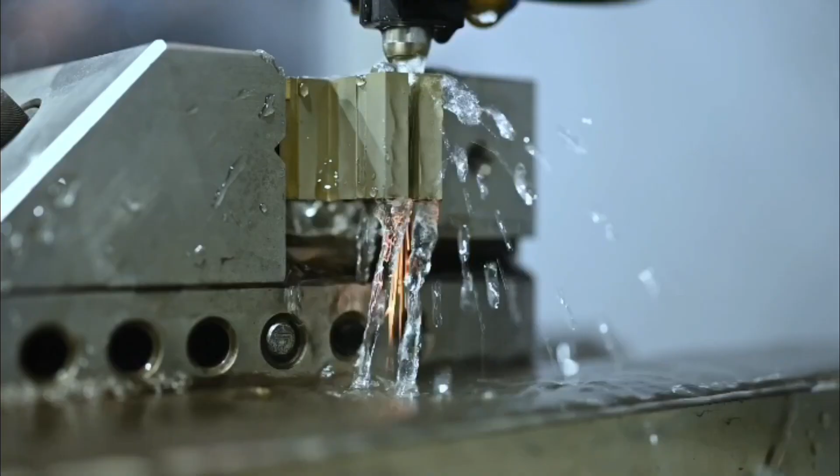Zero tolerance for another episode of Learn to Burn. Today's topic is going to be the challenges of mold making.

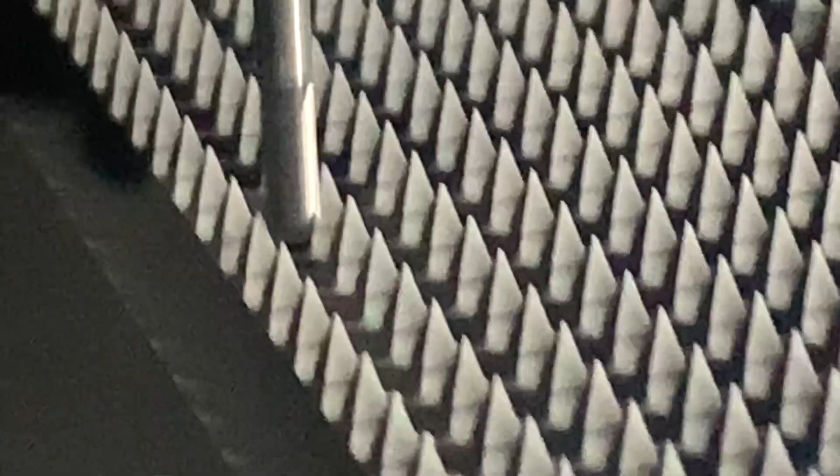I want to talk about how this trode came to be the way it is. Mike will get into the details on it, but this is a combination of three different tool makers' suggestions as to how to achieve these features. And all these features that you see right now, this is literally a quarter of what's needed for the job, and I'll let Mike get into the details on this electrode, as you'll hear in just a minute.

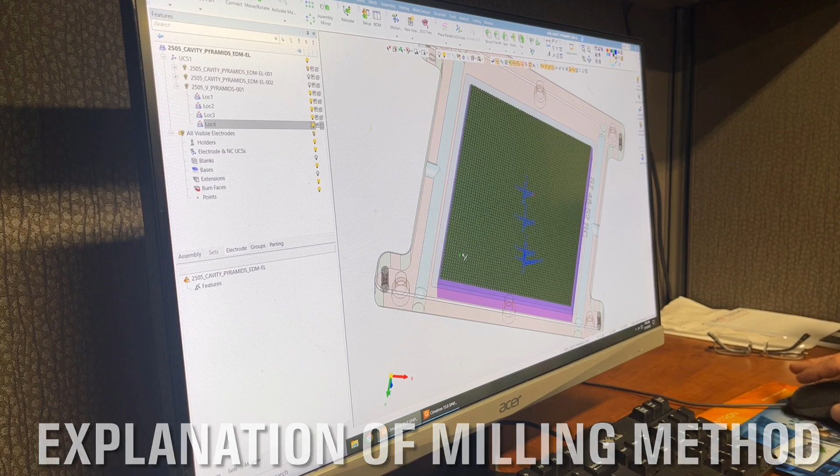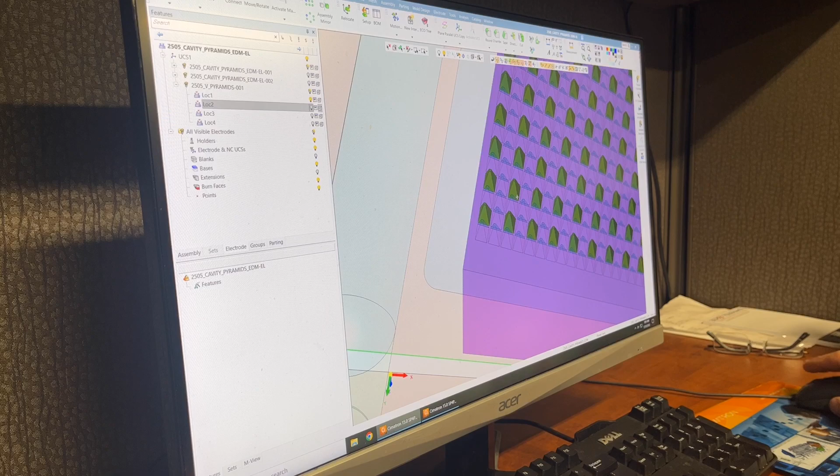We'll start it here. So this is roughly a 5x5 electrode with approximately 5,000 forms standing on it. And the forms are so small that we cannot apply overcut or get a cutter in between here without crashing into the next feature. In order to solve this problem, we eliminated every other form in both directions on this electrode.

What that allowed us to do was to go with a much larger, more robust cutter that would fit in between here, apply overcut to the form without damaging anything else. So you see, this is the first rotation in green. The pink is the unfilled spaces. Second rotation, third rotation, fourth rotation. This completes the entire form and still allows you to cut the electrode with a cutter big enough to make some time on it.

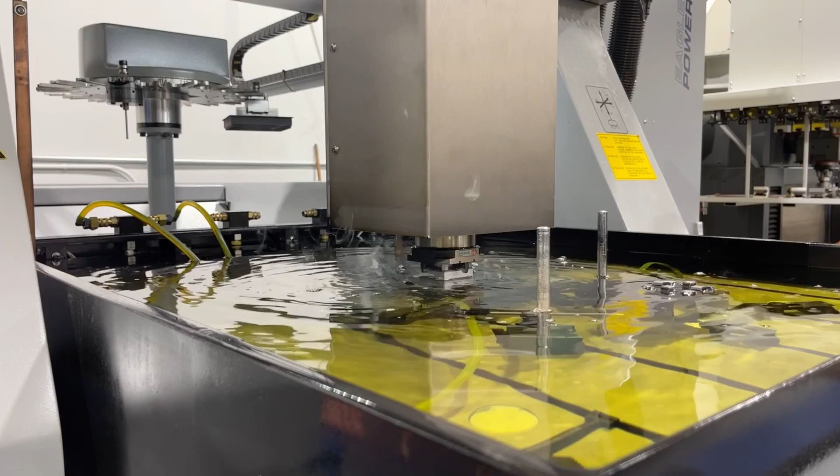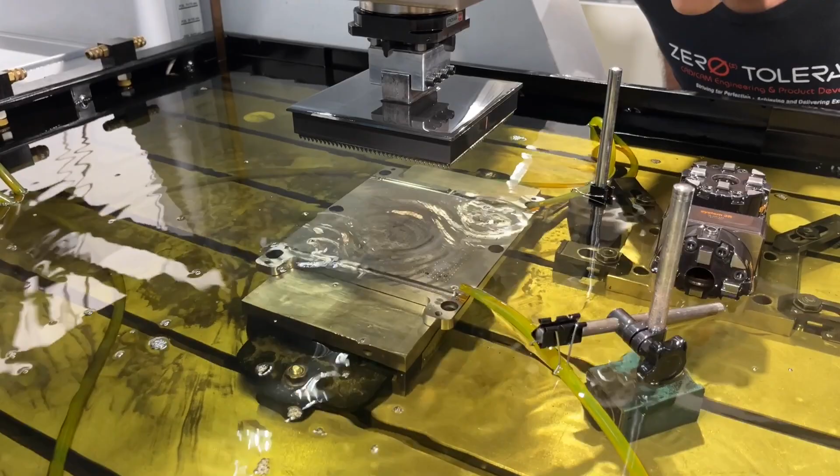Alright, we're at the first stage of this 4-stage electrode. This is going to actually give us a real good way to make these tiny little features all in one electrode, but we have to burn it in 4 places, so it's acting like 4 separate electrodes. It made it fast to cut, like way faster, like a third of the time, and it might take a little longer to burn, but we're going to have a lot better results and more efficient. So this is a real challenging type of burn for a very simple shape.

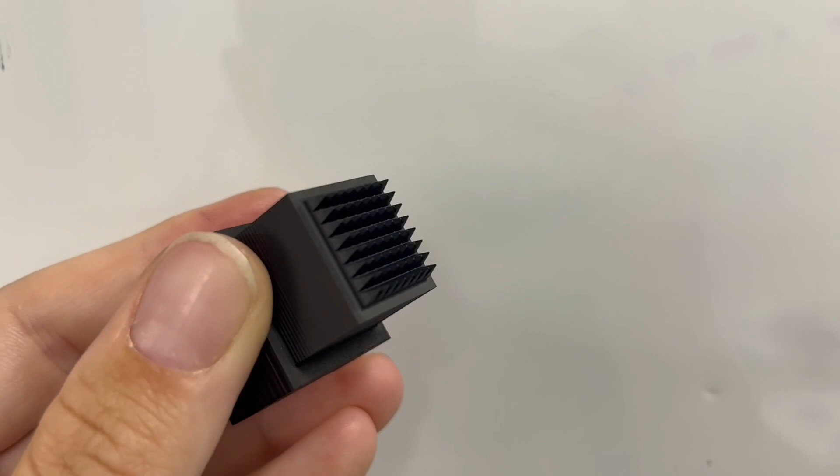Here's a test cut trode that we made, and we determined that this was going to take way too long with too many cutters that would potentially wear out. So that's why we changed our method.

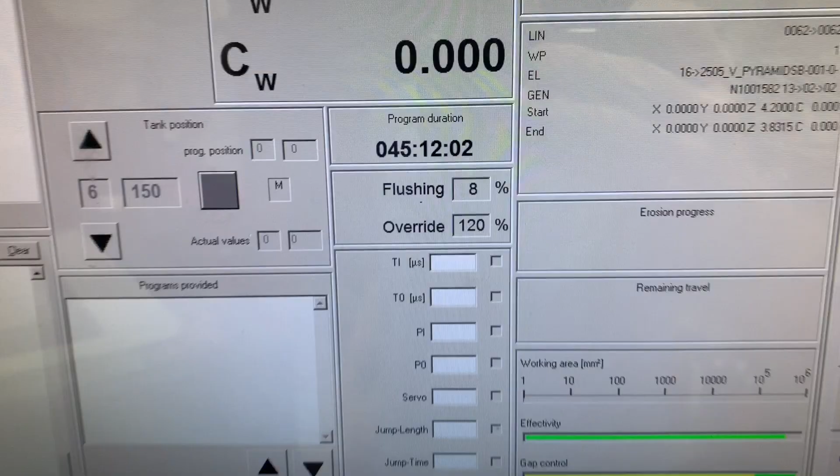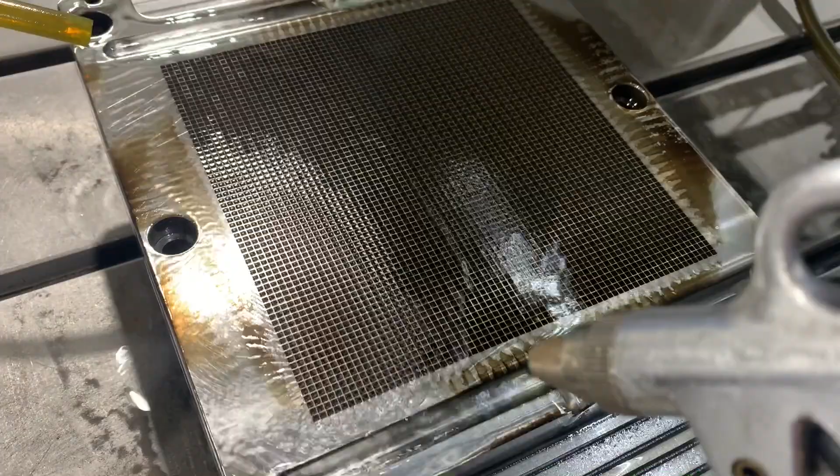Okay, we're here with this really tiny electrode pattern that we put in. It looks like a really good success. We're gonna take a look. It's a 45-hour burn that we've got there. So let's take a look real close. I'm gonna blow this off and see how it looks. I'm gonna move this head back so we can see the light a little bit better. And I'll continue to blow this off and really get a good look at it.

Now, inside here, I don't know if we'll be able to fill this with plastic very well, but we're gonna do the best we can. Depends on how well it packs it and fills in all those sharp corners. Cleaned up, we'll be able to see better.

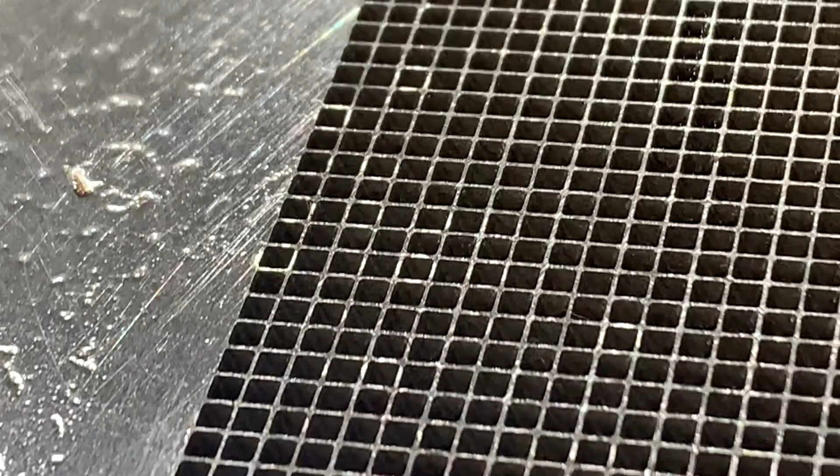I do want to point out some little tiny damage that we see as a result of the higher amps we were trying to push through it. You see these shiny areas? The arc that was created from this electrode with all the power, it actually made a circle area, and I can't hold this very still, but I just want to show you. You can see the shiny areas where it looks like it's slightly damaged a little.

We actually may have to take this block and grind maybe a half a thou or a thousandth off of it to make that clean up. But it's very little, but if you have those settings wrong, that's what can happen. That's a challenge of building molds and making stuff that's never been made. So very cool.

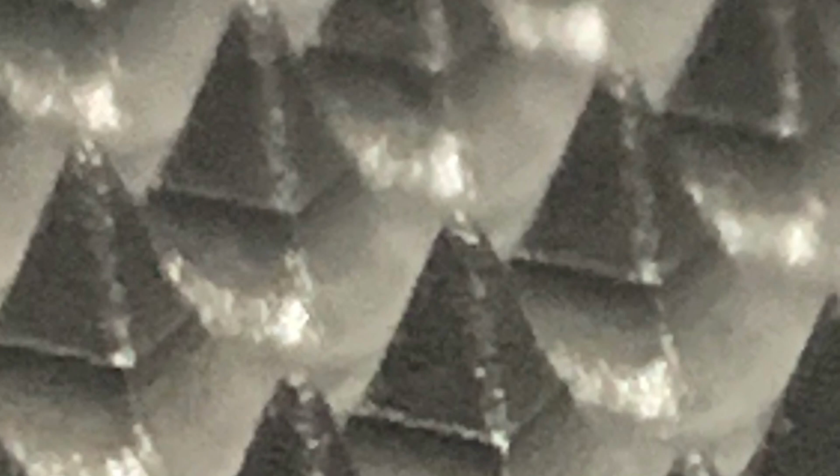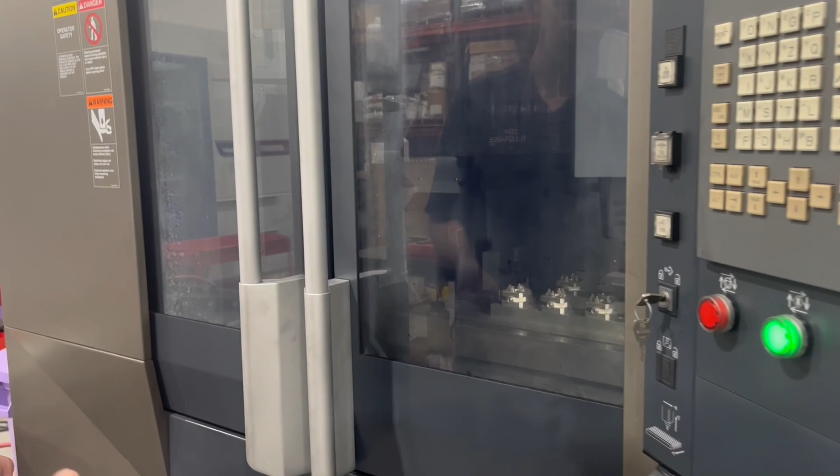You've seen that we were burning this job already. All those little features, the little pyramids. There's literally over 5,000 little pyramids that end up forming this part. And what we found is that the electrode wore more than we wanted with 1 electrode. So we're taking it over here and we're making another electrode, the same electrode, and we're literally dropping it down to give it brand new features so that we'll have a fresh start and try to get the depth we're after.

I know this is kind of loud, but part of the trick, part of the challenge of this part is that there are so many features and it doesn't leave us a lot of room for the cutter, which Mike had already explained.

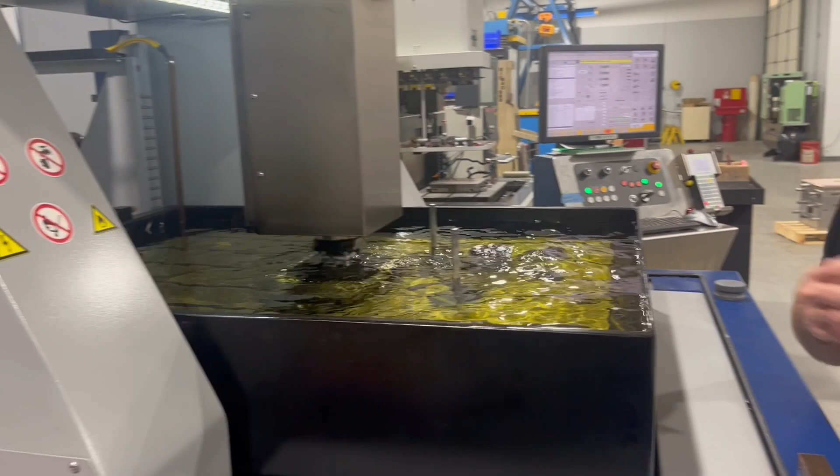So getting it to do what you want, sometimes you have to make more than you were anticipating, and it actually costs you a little bit of time, a little more money to do it correctly. But in the end, we'll end up with a very good part and a happy customer. So we've learned a lot from this job and this little feature that was a big challenge to make efficiently and get it burned properly.

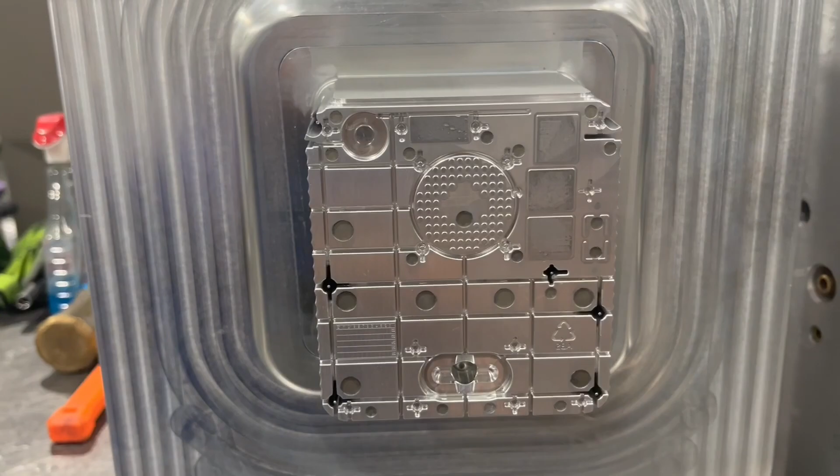All right, we're here with our mold that we just finished running, and this was a big giant slug that had to be wired, and Ethan actually wired this out, and it is actually this block, and we have an insert in the back that has a whole bunch of features on it.

And the reason I want to talk about this is that part of the challenge of building molds is not everything goes the way you want it, like most things in life, but this job was particularly challenging because we're using aluminum, we're making an outside housing for a consumer good, and when we were going to do the finish on this job, we had to sandblast the inside of this part. And when we did that, we actually mushroomed over the aluminum and it created a die lock condition.

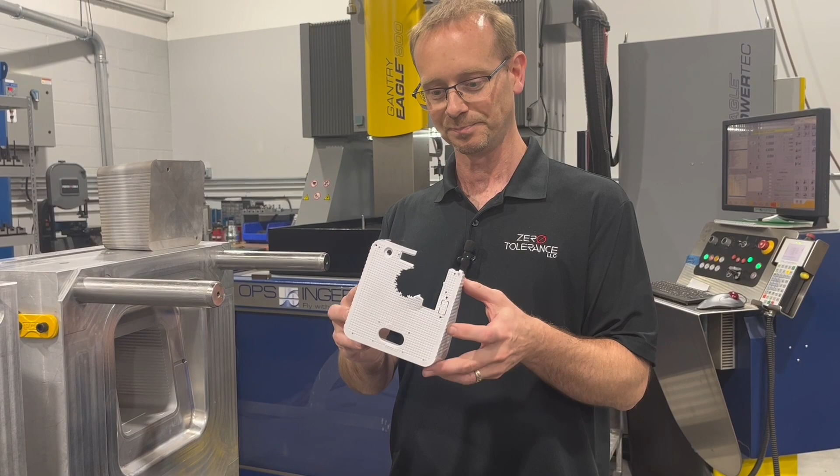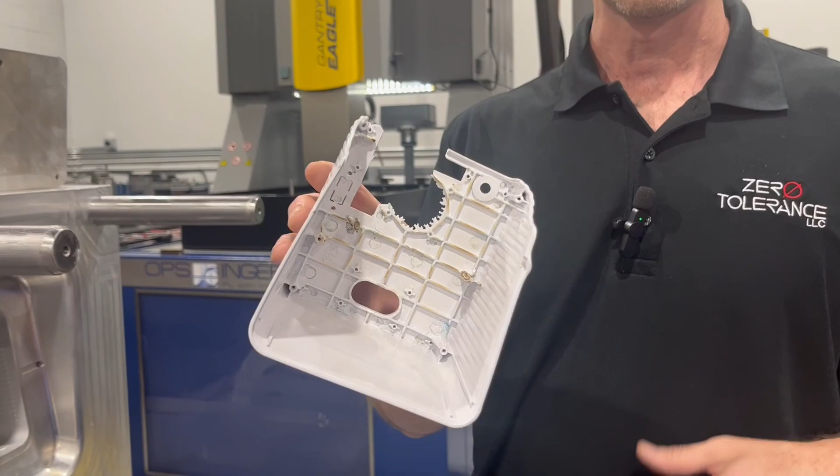And once we did that, we molded some parts, our part snapped off and got stuck in the cavity, which was absolutely horrible. We had to take the whole tool apart and then find out what was going on. We couldn't figure out what was happening when there's so many features inside here that the part should have stayed on the core side.

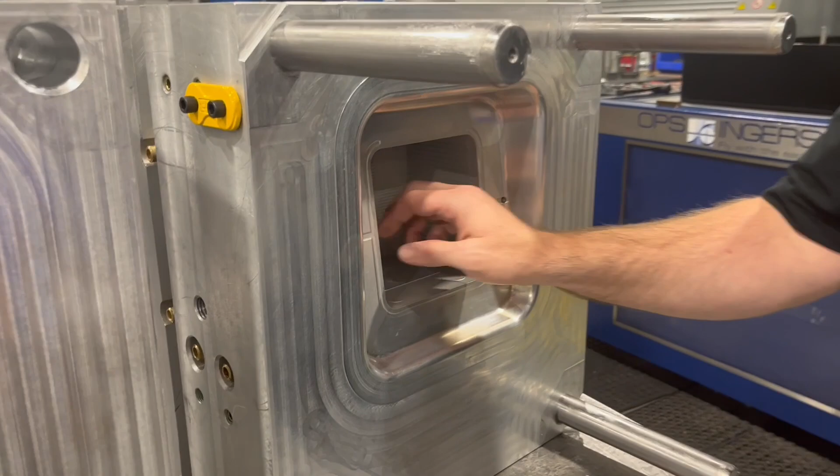So we had to take it apart, and we actually dug into it and found out that we mushroomed over the features, and that ended up making 1,000 little undercuts that held the part on and literally broke it into pieces like this. So once we were able to get those features all straight and draw, we were able to make good parts. And the good parts turned out like this.

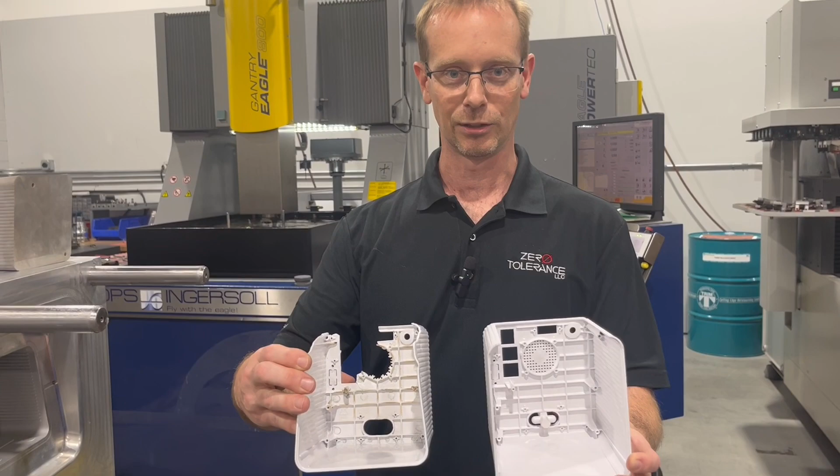So being able to overcome a situation that looks really bad and make it turn out good, that's the whole idea of being a machinist, making molds, anything that you're dealing with in a machine shop world. You have challenges and you overcome them.

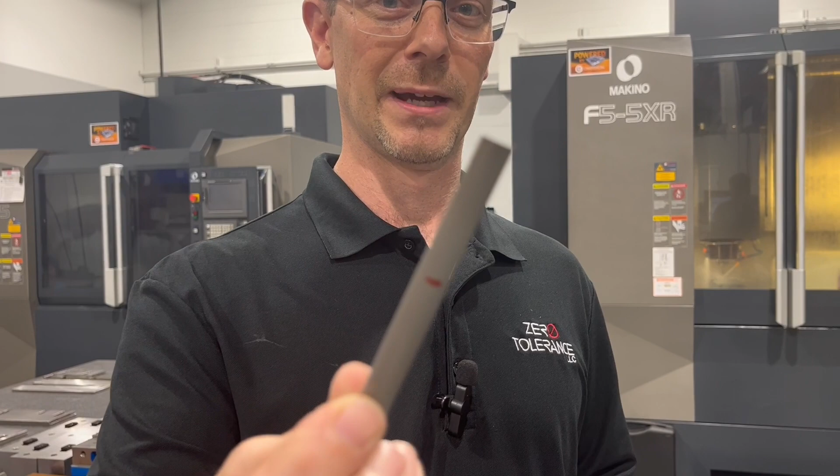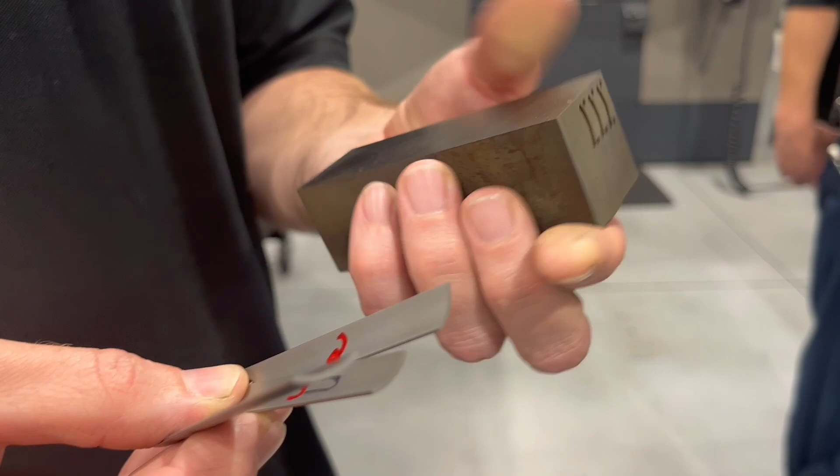Some custom blades that we have to make for a job. It's very intricate and I'm not real happy about it, but we are going to tackle it because that's what the customer is after. If you look at these parts, they're after a blade that looks like this, and it's not real fun to make these. So unfortunately we got 3 different sizes that we're going to make, and this is the block, and we're going to have Ethan explain the method to the madness and how he went about doing these.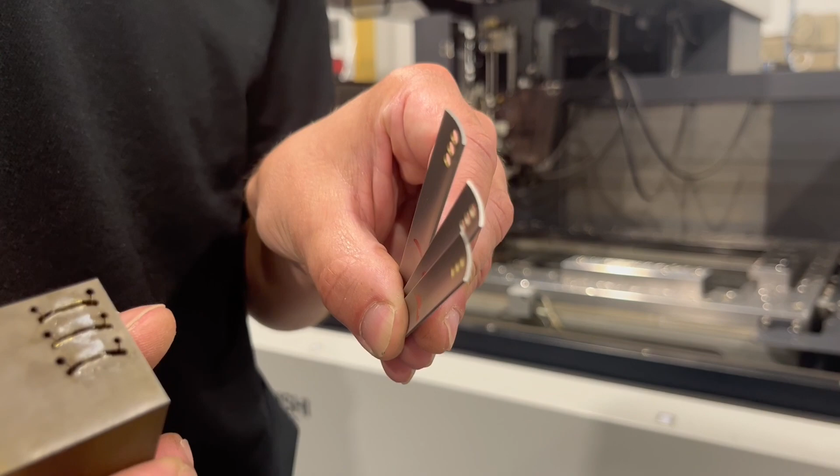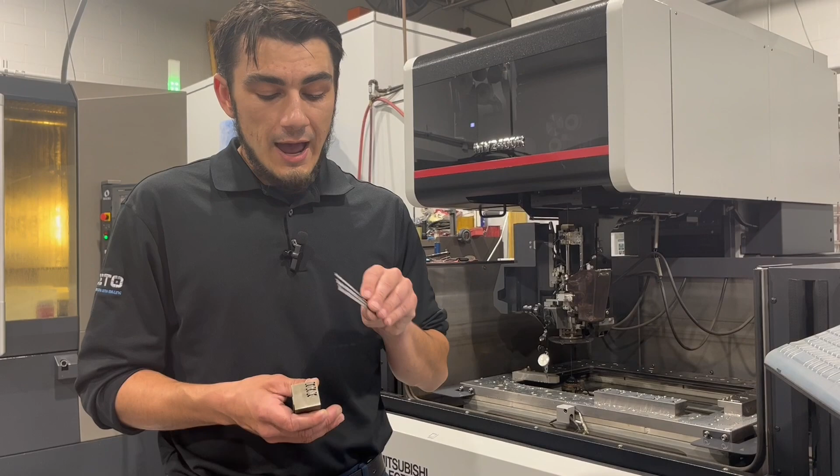Those blades that Steve was mentioning. Now, as you can see, these are only 32 thousandths thick. So we got a lot of flexing and a lot of warping that can happen with these. Now the method that I went through it, which can pertain to some people but not others, is I went about it in a way where if you don't have somebody available to do, say, bench work on these,

because there's always going to be the EDM tab left over on it, if you don't have somebody to take care of that bench work for you, what you'll notice I did on this block was that for each blade, there's two holes, two start holes from this EDM drill.

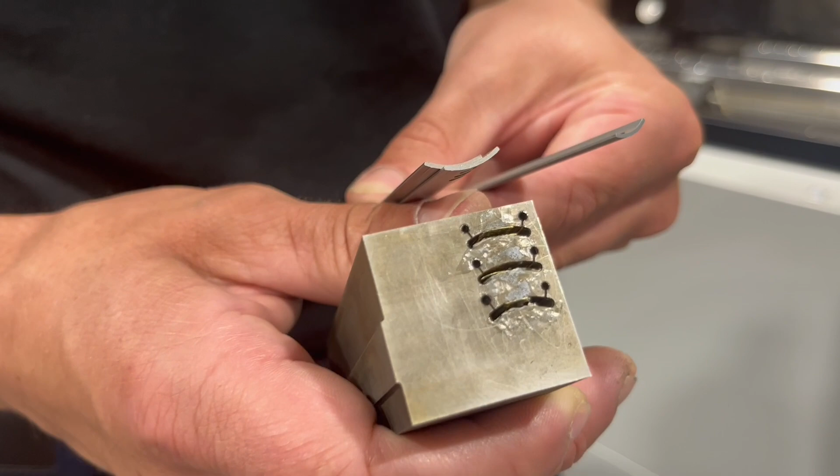And the reason behind that was because since these are so small, over such a great distance, if we were to use only one holding tab, it would have to be a larger size to keep the part from shifting due to flex and stress material. That's great, but then you're going to have a much larger tab that you're going to have to deal with that's not going to be as accurate as the rest of the part.

So the theory behind this was to create two tabs to support the piece so that it didn't flex, but also those two tabs only being 0.008 wide. That allows there to be a very, very small witness mark left over. Now, this is still not the preferred way most of the time. I was doing this on an extreme rate because, again, I was pretending there wasn't going to be any afterwards finishing. So I'm trying to make sure the surface is perfect the entire way through.

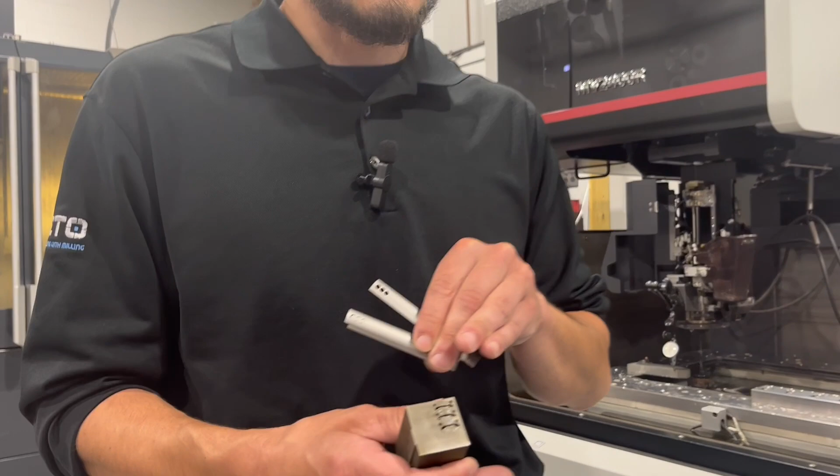So what I had to do, though, when it came time to cut off the tabs, is you'll notice we have a lot of dried up glue here, and also there's some brass shims still inside the workpiece. What I had to do before we cut the tabs was I had to take brass shim and shove it between the gaps that the wire created during its rough and skims.

That way, the brass not only held the part in the block still when the tabs are cut off, but it allowed continuity to flow through, because once those tabs are broken off, there's no way that there can be any grounding action and you wouldn't be able to get the tabs burnt off. But then adding the glue on there was also another way to sandwich the pieces inside the workpiece so that the flush pressure wouldn't necessarily break them free.

Again, it was a little bit more of a finesse process. If you do have the ability to have a bench hand or even a precision surface grinder take care of the tabs, I would go for that. But in extreme cases, this is just one method how you can deal with extremely thin and also long workpieces.

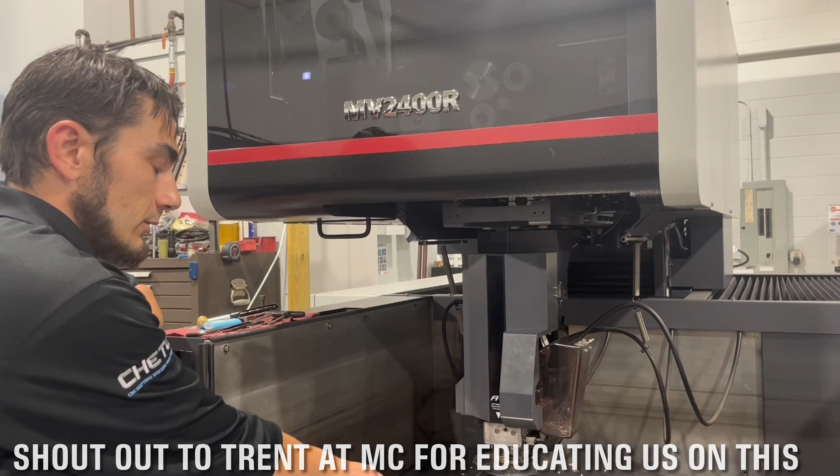So we have a test block in here just to give you a demonstration of it, and if you were to get a little bit closer to it, you will notice that I actually did put it on an angle, so you can tell that we're not going to be cheating here, but we're actually going to be showing this.

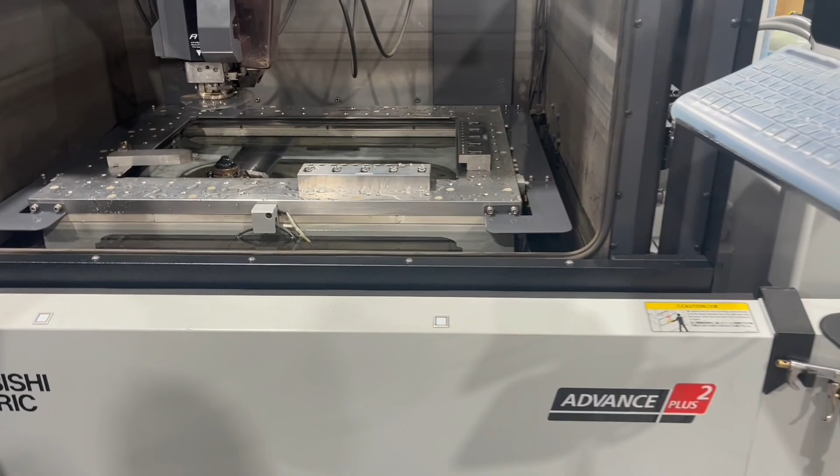So this is a great function of the Mitsubishi, is that it's going to be able to pick up this piece using a nice sidewall, which that is key. You don't want to use anything wavy or anything from a rough cut. A good pickup wall, ground surface, is going to be your best. But I don't have to use my indicator.

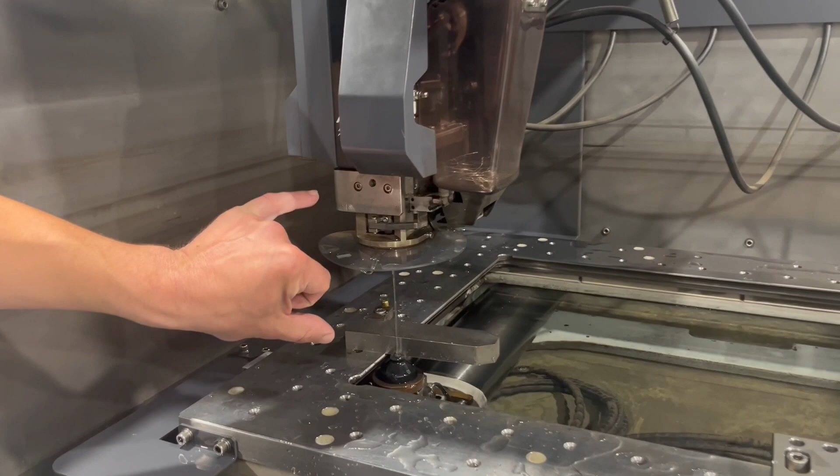First thing that you want to take note of is the position of your workpiece, but also the position of where your wire and your head are. Because on the monitor, there's going to be several selections that you need to make that are position orientated, so that your axis rotation value is going in the correct direction.

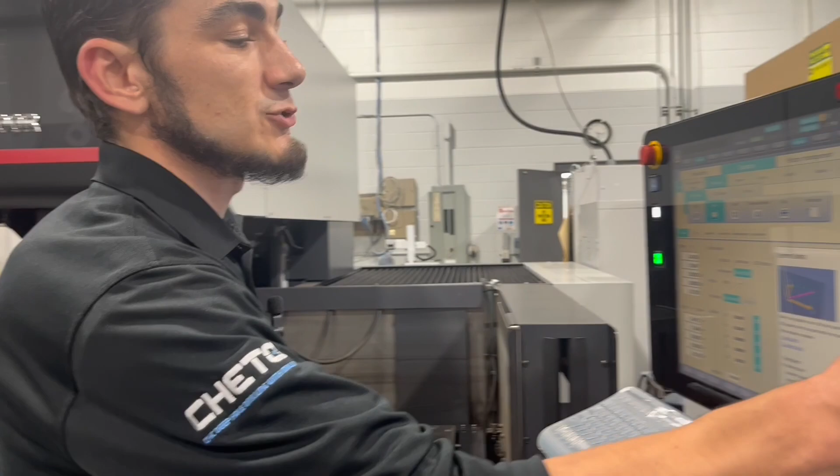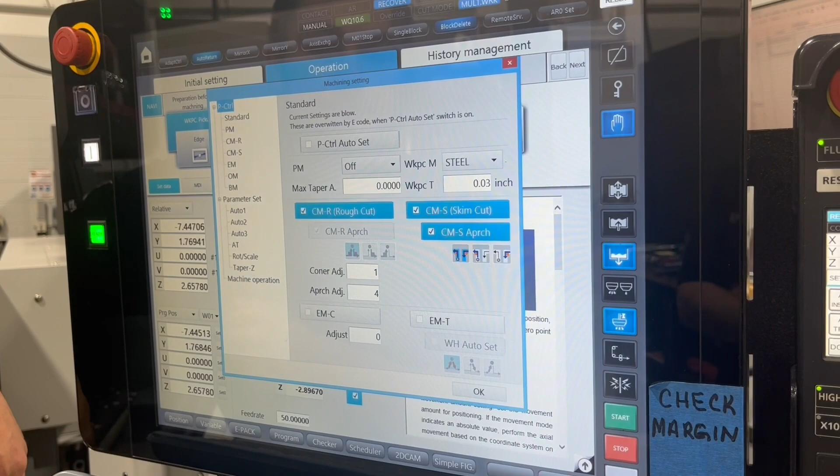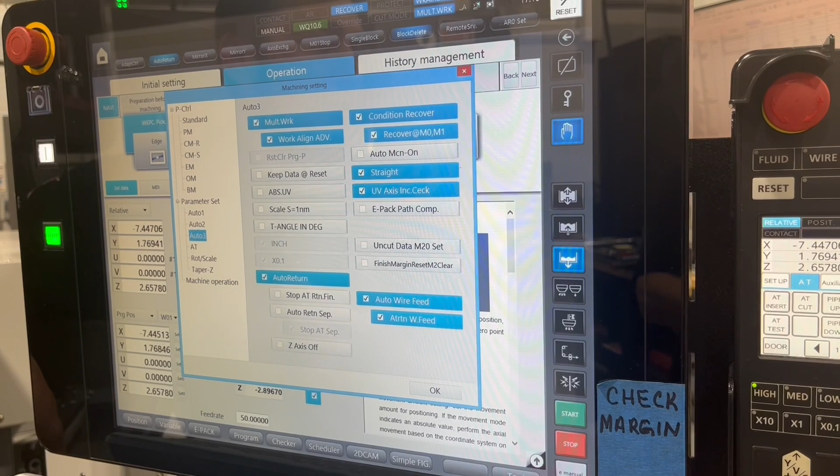Now, there's a few ways to do this, but I'm just going to show you one of the ways that I prefer, which you might have to go ahead and turn on a couple switches on your machine. So for example, in your machine setting, Auto 3, if you turn on multiple work and work alignment advanced, you'll be able to follow these steps exactly. Even if you don't normally work in this switch on state all the time, it will at least work for this function. Because again, I'm only going to show you just the one way for today.

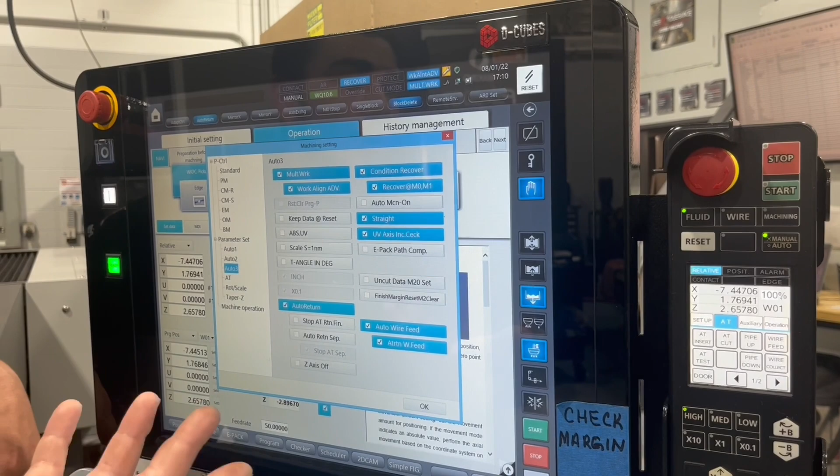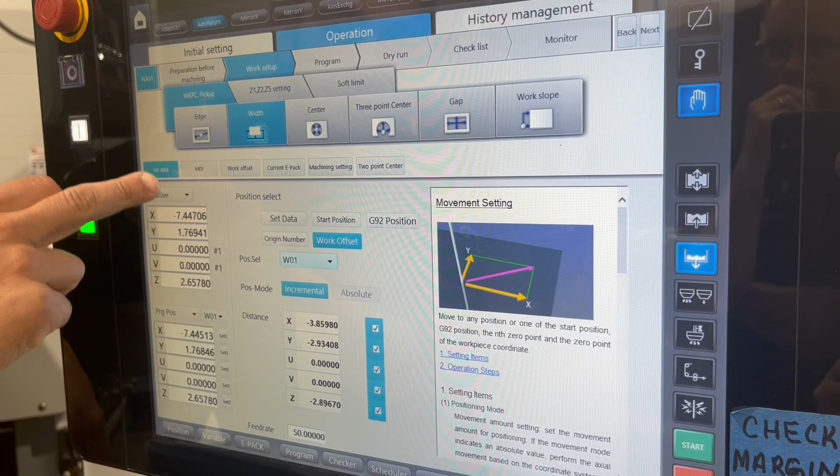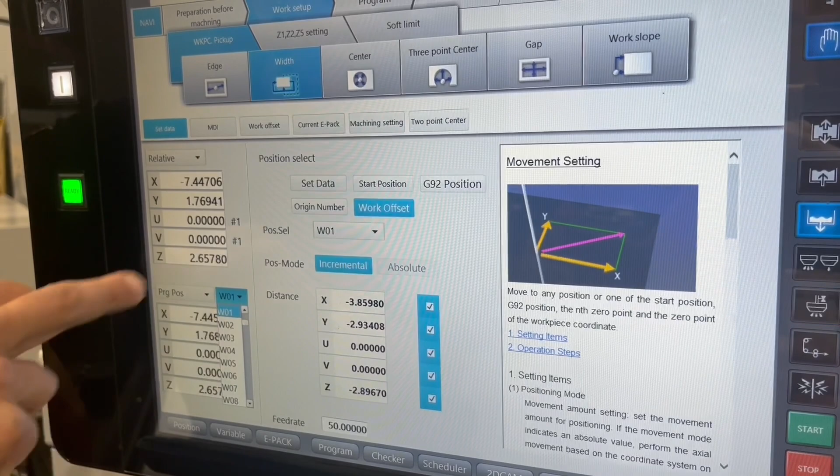So once these two switches are check marked and you return to your home screen, I recommend putting the relative menu on top and then actually program position and then choose a work offset of your choice. It doesn't matter if it's G54, 55, or any of the W's, but this is what the angle value is going to be set to.

So, while we're in our work setup page, workpiece pickup, on the very far end is the black magic that a lot of people don't mess with, the work slope. Now, like I was saying before, the orientation of your part and the wire do matter.

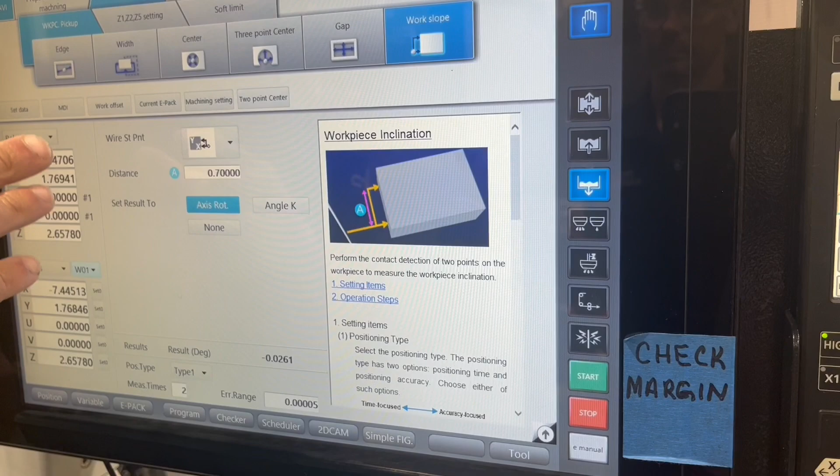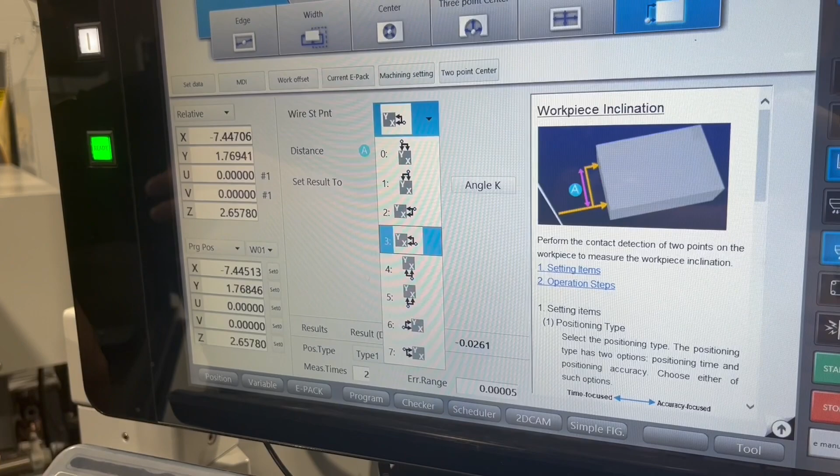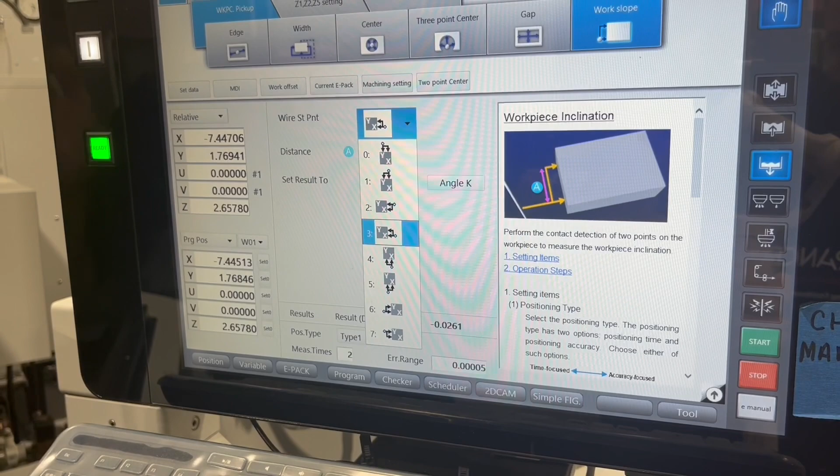So in your drop-down box, which is the wire start point, you want to look for the picture that is the same setup as what you have. For example, ours would be number 3. Our wire is on the Y negative of the part, and we are starting in X negative and will be moving to X positive.

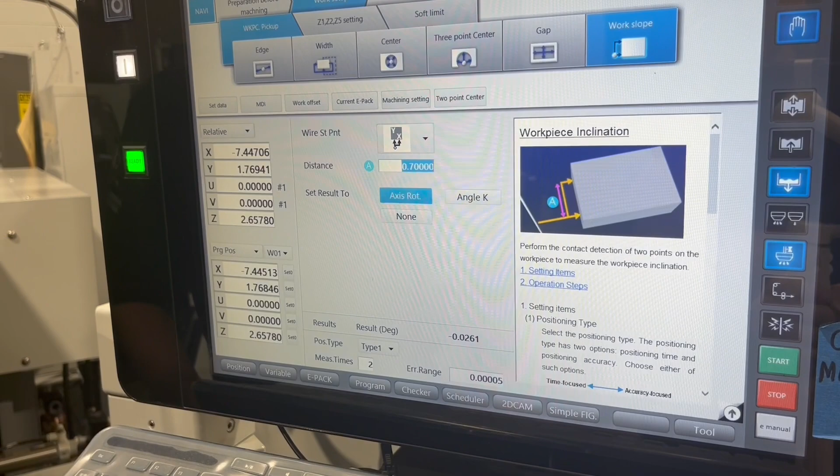After that, you just simply set the distance that you want the wire to travel over the piece. Again, the more distance you can set, the better, it'll be more accurate. For this demonstration, I'm just going to do 0.5.

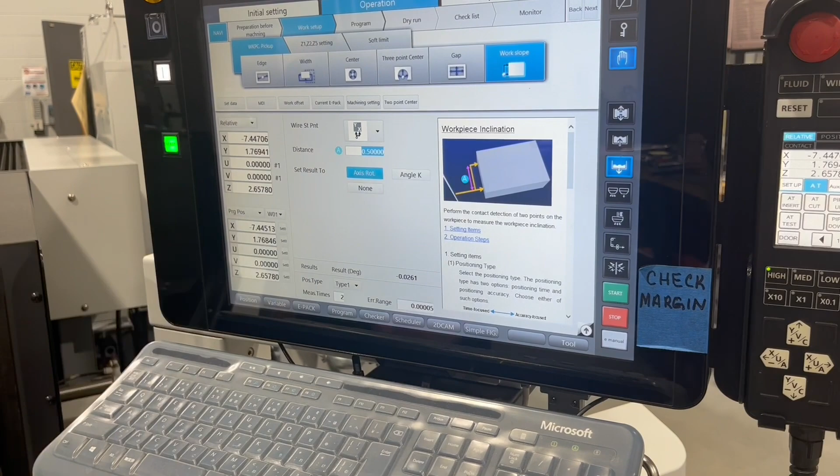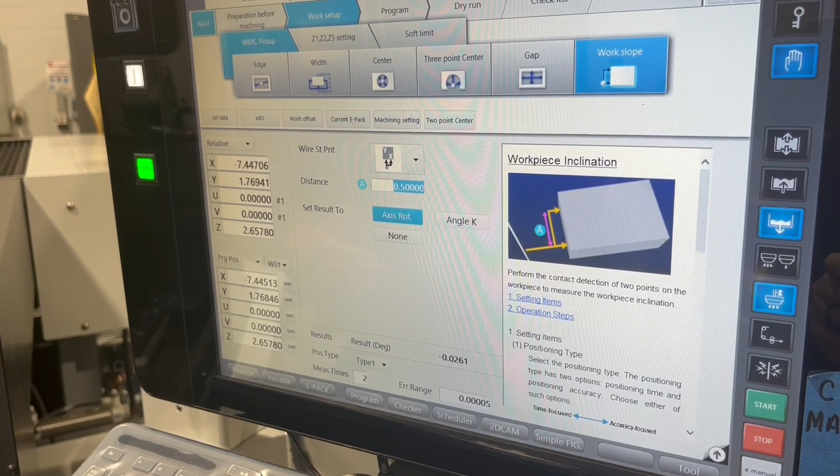And let's make sure that you set your value to axis rotation. Axis rotation is how the machine skews its axis in degrees. Angle K is rotating the program. So we won't go too deep into that, but the main thing is to just set axis rotation. After that, we can just hit start.

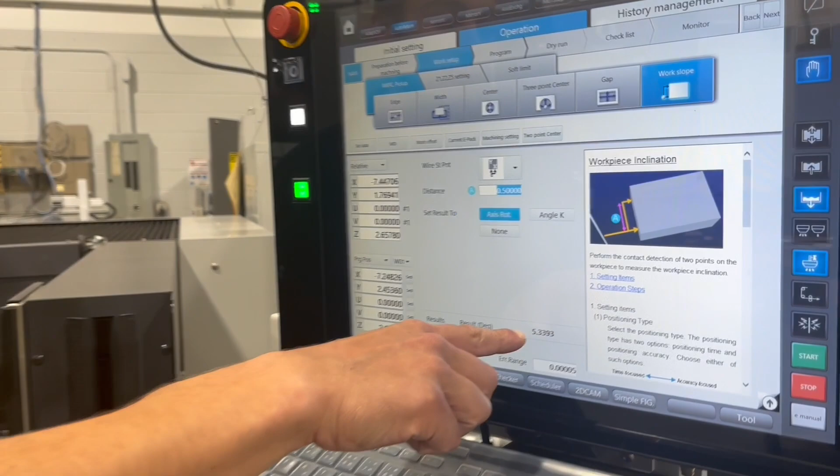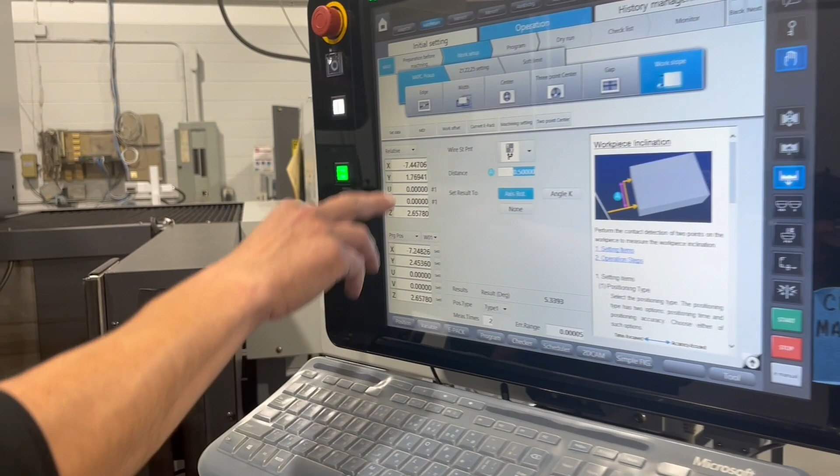Now on the screen, we can see that it actually gives you the resulting degree at which that workpiece was offset on the table. So we're almost at 5 degrees. So now the cool thing is that your relative system is now switched with the machine to that rotation angle. The machine has comped all its axis to actually make that 5 degrees seem like it's on 0 for you.

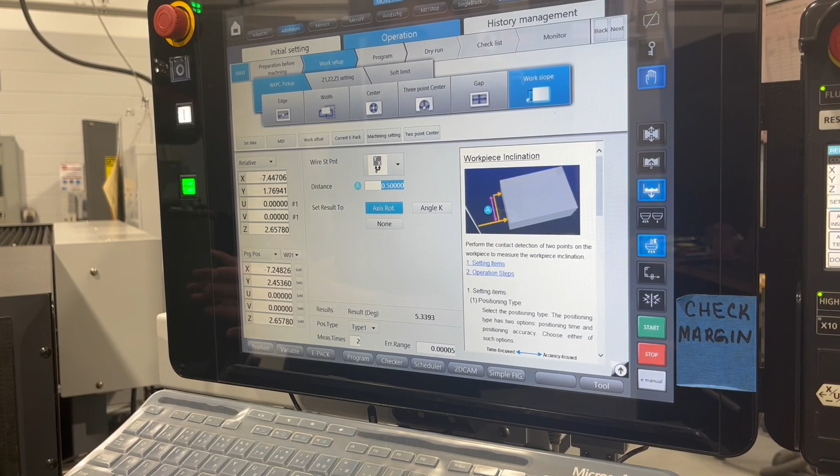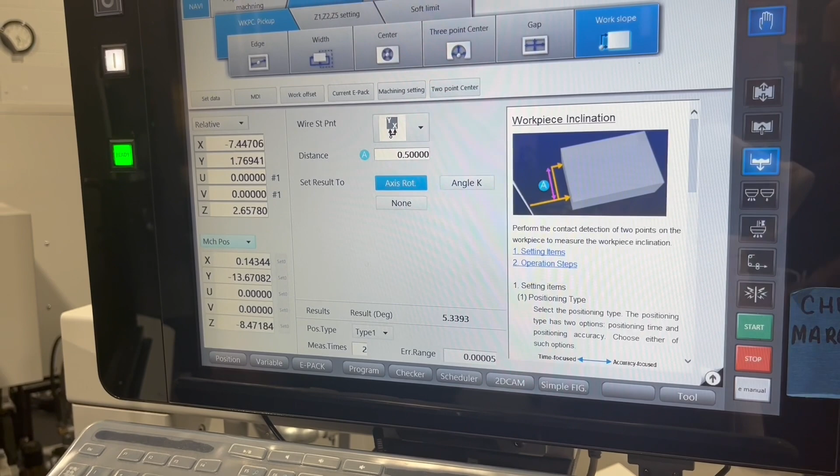To kind of give you what I'm talking about, if you switch one of the menus over to the actual machine position, which is reading off of the glass scales, you will notice that the machine position will move, but the relative will only move in one axis. For example, let's move in X positive, and you'll notice relative only the X will move, but machine position has both axes.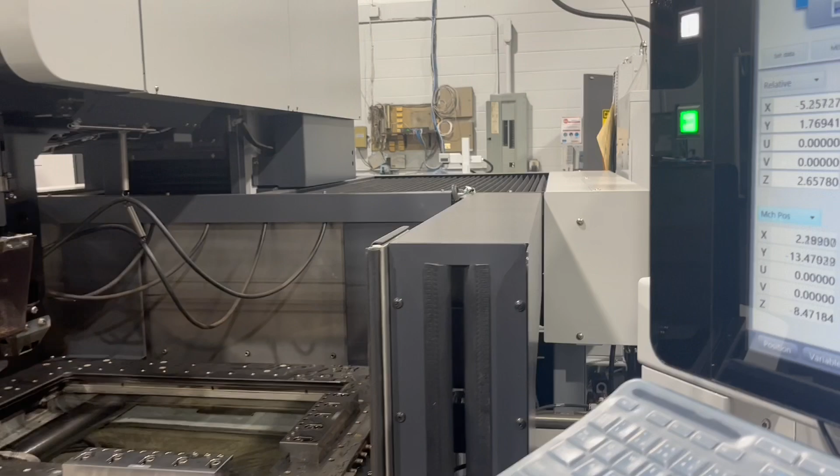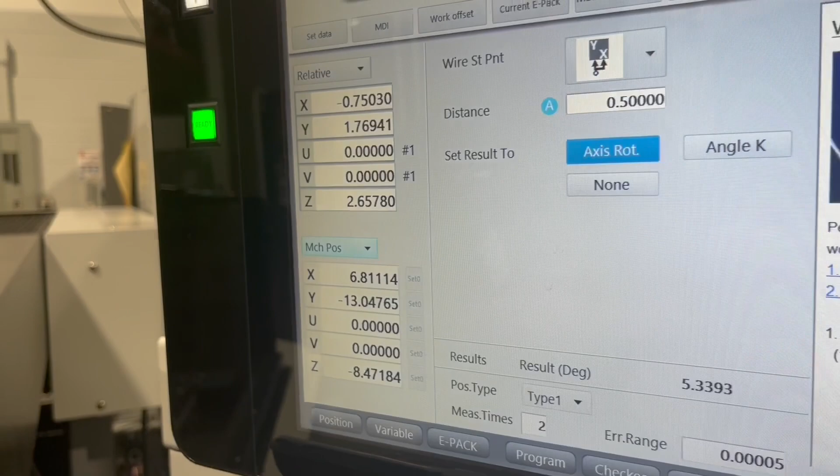So the theory behind this is to just pretend that you're working with the machine like normal. Don't try to remember all the trig or that you're skewed off of 5 degrees. It's basically saying, I've rotated my axis for you and it's taking care of it.

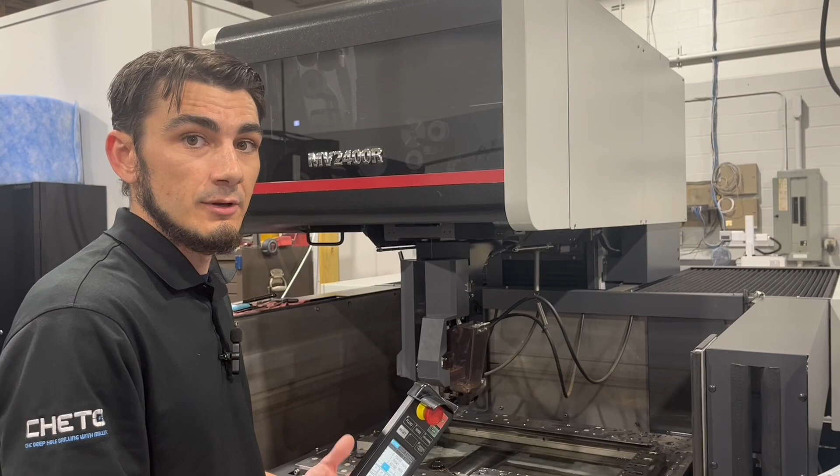Now again, it is very important, I can't stress this enough, to make sure that you do set the correct orientation of the work slope wire start point. If you don't do that and you're going in the wrong direction, it will actually skew the way the degrees are. I mean, 0, the 90 degrees, the 180, it can all depend on where your wire is at. So you must make sure that that is set, and for this demonstration, those 2 switches in machine settings were on, how we had them for this.

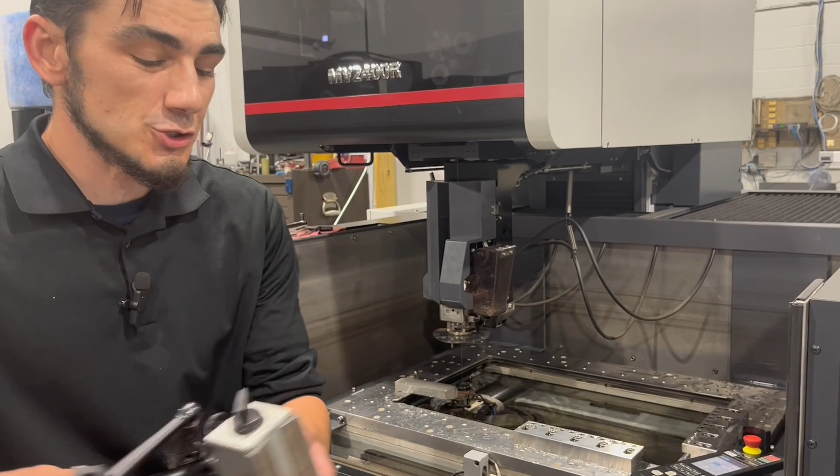Now, to actually show you that it did work, granted, there might be a little deviation because I only went over about a 1/2 inch. When I zero my indicator on this wall and run it in X positive, it should show 0 because the machine has skewed to the part.

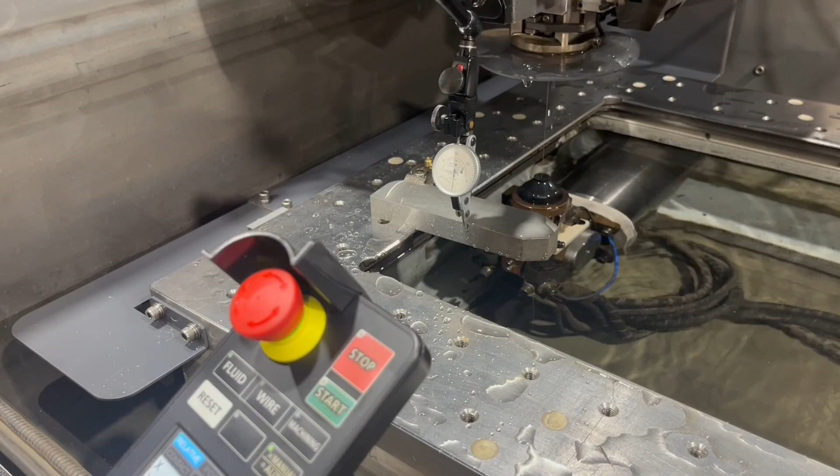This could be a great function for details that are very hard to align, or actually very fragile features where you can't use, say, a brass tap or manually move it around. You can just let the machine pick it up.

The last thing that I do want to stress, though, is because those 2 switches we turned on, when you are done with the program and you no longer need to run the part on this angle, you must make sure that you clear the axis rotation value so it doesn't carry over onto your other jobs.

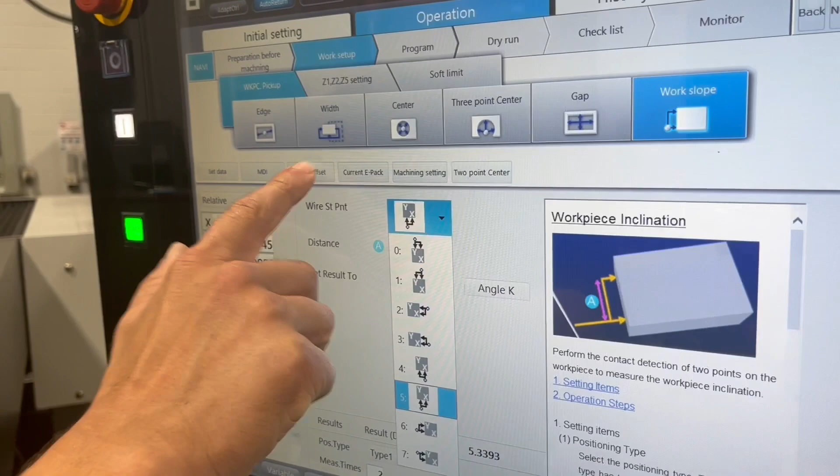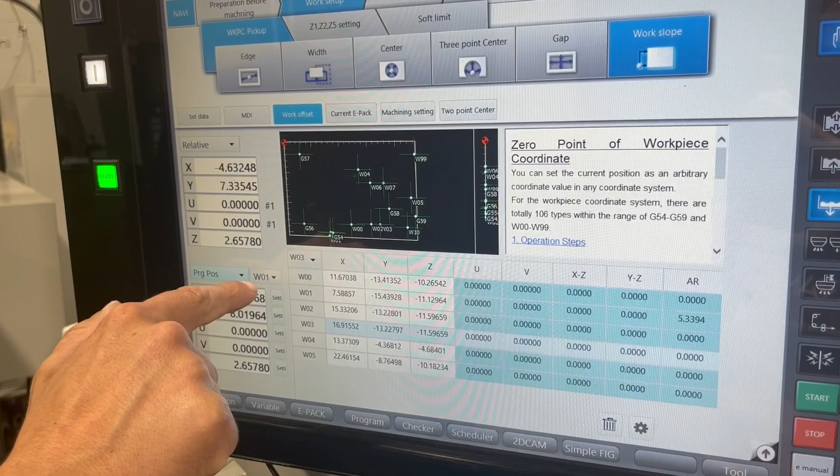Now, the most foolproof way to do this is you actually go into the work offset table and you find the program or work coordinate position that we set it to. For example, mine is W01. If you go all the way over to the side, you see that's where our AR value is saved.

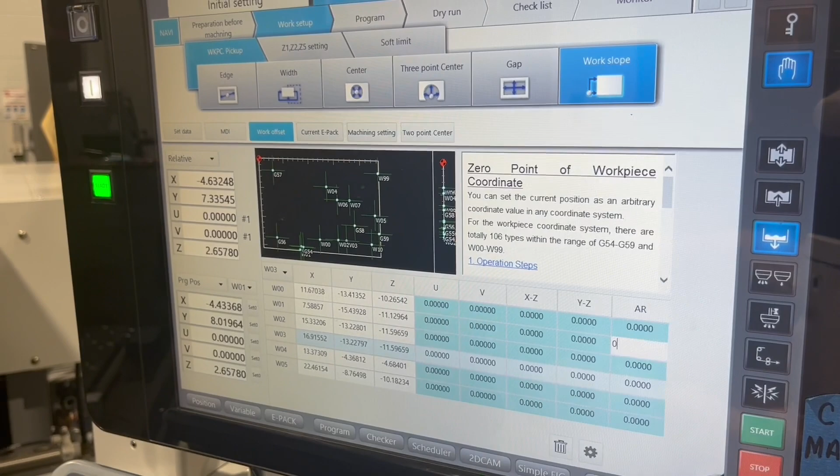Now, by zeroing that out, the machine is back to exactly how it was before you did the work slope pickup. So now you can return to your jobs as normal. Just remember the couple things we talked about. The wire start point, making sure the 2 switches were on, and also when you're done, you want to make sure that AR value is cleared, and then you'll be able to carry on and do what you need to do.